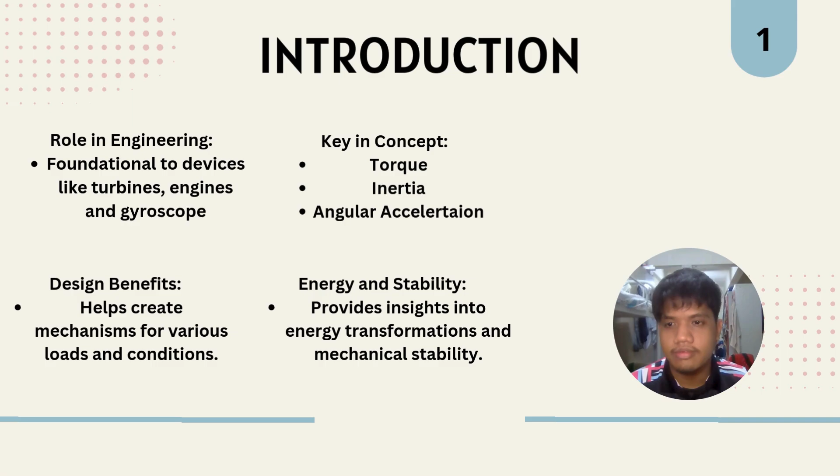For the objective, theoretical derivation is crucial for establishing the relationship between torque and angular acceleration, providing a fundamental understanding of how these forces interact.

Experimental validation is essential to measure and confirm this relationship through rigorous experiments, ensuring that the theoretical concepts hold true in practical applications. Additionally, rotational inertia analysis examines the impact of rotational inertia on the system, revealing how inertia affects the stability and performance of mechanical components.

By combining these three aspects, derivation, validation, and analysis, we gain a comprehensive understanding of rotational systems, which is vital for the advancement and optimization of mechanical engineering technologies.

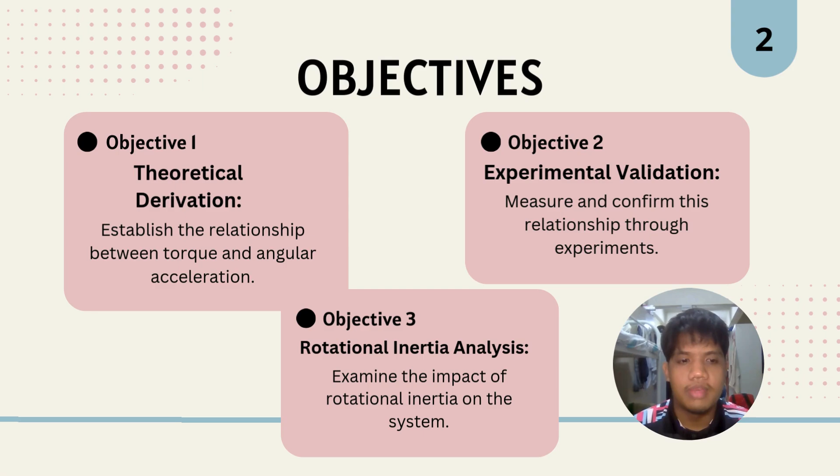The structural methodology is for understanding the interplay between torque, angular acceleration, and rotational inertia. This study integrates theoretical derivation, experimental validation, and analytical insight to provide a comprehensive understanding of rotational dynamics. This understanding is critical for optimizing the performance and stability of mechanical systems, with implications for energy efficiency and industrial advancement.

Our methodology is structured into a sequence of iterations: number 1, theoretical derivation; number 2, experimental validation; and number 3, analysis of rotational inertia. Each phase is designed to build upon the previous one, combining theoretical frameworks with practical experiments to verify and analyze rotational motion principles.

In the first phase, we derive the theoretical relationship between torque and angular acceleration using Newton's second law for rotational systems: Torque equals moment of inertia multiplied by alpha.

We extend this principle to various rotational systems such as solid disks, hollow cylinders, and point masses, developing mathematical expressions for each configuration. The second phase validates the theoretical relationship experimentally.

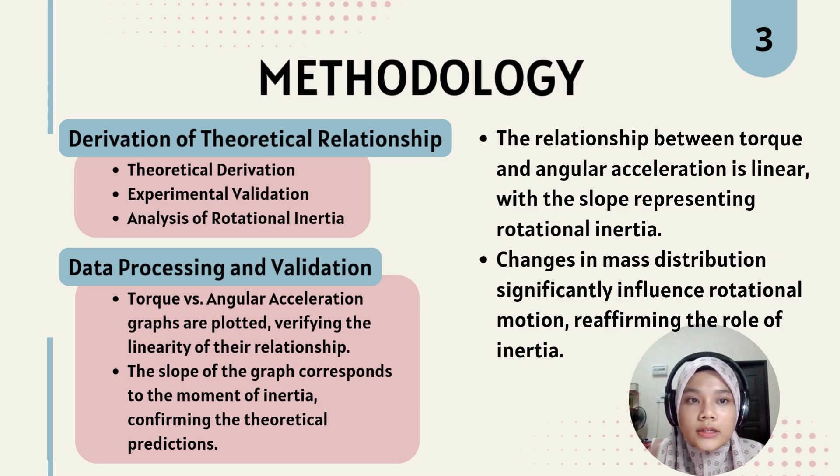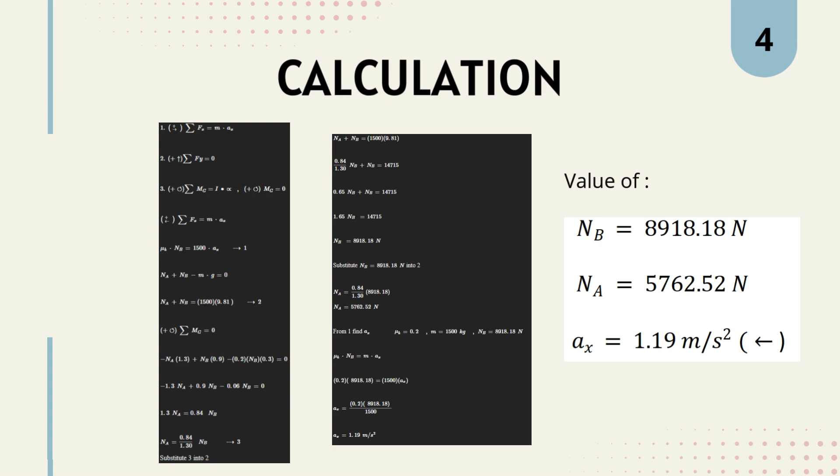Thank you very much to my friend. My name is Mohd Ahmad, and I'm going to continue with the calculation, analysis, and also the free body diagram.

So from the data given in the question, we managed to illustrate the free body diagram for this question. And next we continue with the calculation.

From the calculation, we managed to get the normal force for A, which is 5,762.52 Newton for the front wheel, and the normal force acting on B, which is 8,918.18 Newton for the rear wheel.

From here, we continue to make two graphs: one for the coefficient of kinetic friction versus acceleration, and another for the normal forces acting on A and B versus acceleration. For the acceleration, we managed to get 1.19 meters per second squared.

So for the analysis, the front wheel is 5,762.52 Newton, and the rear wheel is 8,918.18 Newton, so the distribution indicates that the rear wheels bear a larger load compared to the front wheels.

For the weight distribution, the greater load on the rear wheels suggests a rear-heavy design, which is typical for vehicles where the driving force is applied at the rear wheels.

As an example, rear wheel drive cars. This distribution is important for traction and stability, especially during acceleration. For dynamic stability, the car's acceleration of 1.19 meter per second squared is efficiently achieved due to the larger normal force on the rear wheels, which provides better traction. The stable normal forces acting on normal forces A and B during acceleration indicate predictable and reliable vehicle dynamics.

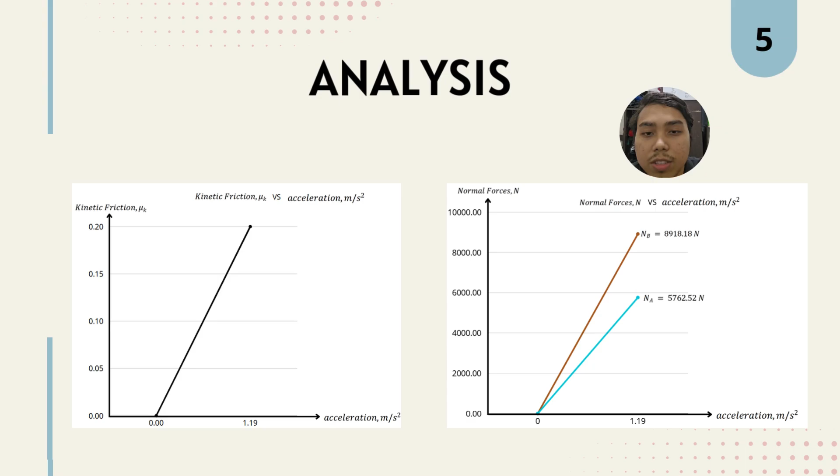Next is the evaluation. Constant normal forces, which are the normal force on A and B, remain constant, indicating a stable weight distribution on the front and rear wheels of the car. The front wheels bear more load, which is 8,918.18 Newton compared to the rear wheels, suggesting that the car is designed to have a heavier front. This is important for stability and steering.

For friction and acceleration, the frictional force calculated using the coefficient of kinetic friction, 0.2, and the normal force on B, gives us an acceleration of 1.19 meter per second squared. This shows that the car accelerates efficiently given the coefficient of friction and the forces acting on it.

Next is dynamic stability. The constancy of the normal forces and the resulting acceleration suggests that the car dynamics are stable and predictable under the given conditions. The car's motion is primarily influenced by the friction between the rear wheels and the road, as indicated by the calculations. Lastly, practical implication: the analysis highlights the importance of maintaining proper friction and weight distribution for optimal acceleration and stability. It also underscores the role of kinetic friction in determining the car's performance.

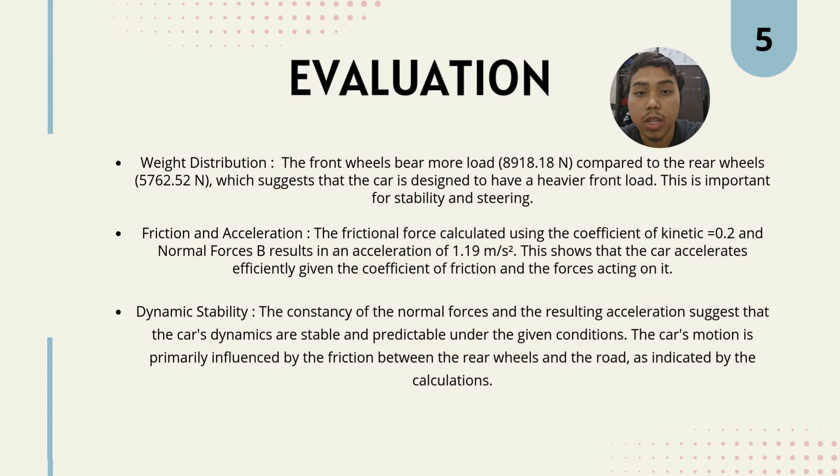For this project, I will talk about the discussion. The rolling acceleration depends on the geometry of the cylinder and the angle of inclination. For moment of inertia, a lower moment of inertia means faster rolling for a solid cylinder. For higher moment of inertia, we get slower rolling, which is the hollow cylinder.

Friction was sufficient to prevent sliding, ensuring rolling motion. For this project, we found it essential for maintaining rolling motion, preventing sliding, and aligning with theoretical assumptions. For mass distribution, solid versus hollow cylinder illustrates the impact of moment of inertia. Higher inertia means greater resistance to rotational acceleration.

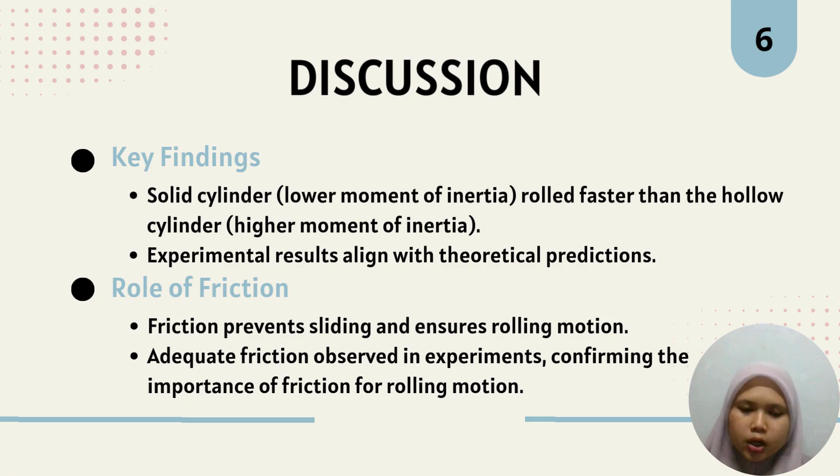This project shows strong agreement between theory and experiment. We are confirming rotational dynamics principles; future experiments could improve precision and explore varying materials and friction coefficients.

So here guys, I will continue this presentation with the conclusion. In conclusion, the case study of the prototype car illustrates the critical interplay between weight distribution, friction, and vehicle dynamics.

The analysis revealed that with a mass of 1.5 Mg, which is 1500 kg, and a center of mass position 1.3 meter from the front axle and 0.9 meter from the rear axle, the car's acceleration is significantly induced by the force acting on it.

The rear wheels, which are responsible for driving the vehicle, experience slipping due to a coefficient of kinetic friction of μk equals 0.2, leading to a calculated frictional force of 1204.16 Newton. This force serves as the net force propelling the car forward.

Applying Newton's second law, the resulting acceleration is approximately 0.8028 meter per second squared. This case study implies that the slipping of the rear wheel and the limitation imposed by friction critically affect the car's motion, restricting its acceleration capabilities. Understanding this dynamic is essential for optimizing vehicle performance and stability, particularly in scenarios where rear wheel slipping may occur.